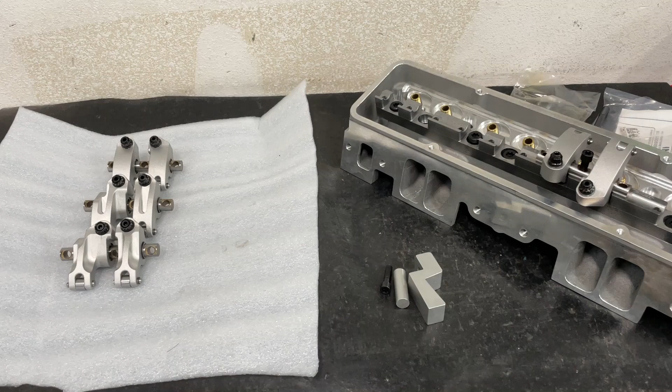This is Friday, which would be about racing, and I've got some information about that, but I'll save that to the end. I'll show you one little tech thing because I did get some parts in, so I thought maybe I'd give you some information about rocker arms, shaft rockers in general. I've done another video, but not like this one.

I wanted to show you some other stuff because I know this has come up before, at least in one of the forums, and I thought, well, why not just do a little video about it while I'm doing my little racing thing, because really not much is happening in racing. It's still pretty hot here, and I have the headers here, and I'll show you that part later on, and we'll talk about it, but I haven't got to do any racing, but I hopefully will soon. But anyway, let's kind of get to today.

I'll give you a little background. I've ordered several sets of shaft rockers. I've got one set ordered from Crower, which has been on order since June. I've also got 4 sets on order from T&D, but they're back ordered. Well, I ordered one of those in June too. So I would love to be able to show you a comparison, but I don't have one of the T&D or Crower in stock, even though they're ordered.

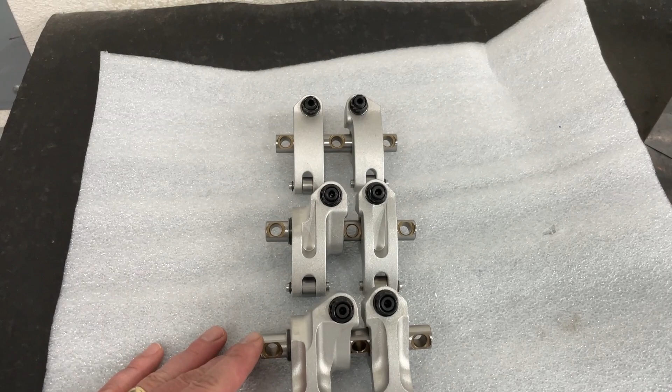But what I do have are these. These are from Jesel, and I'll show you. And I have to say, Jesel's rockers are probably the more expensive shaft rockers you could buy. However, you can get them by far quicker than you can the others. So if you're looking for speed, Jesel for sure will get you quicker. Anyway, let's get started. So I got them kind of in an order here, and I'll give you more information about the shaft rockers themselves.

So this first one here, this is their Sportsman line. These are the more economical ones that they sell, and this is a Profiler head, and I've got one kind of set up on there. These are actually what I use in the S10. These run around $1350 retail for a set, so they're not cheap, but $1350 for their Sportsman ones.

And they have rocker ratios from, this is for small block Chevy, but they have them for LS's and small block Fords and several others as well, big block Chevys as well. But I'm just going to talk about small block Chevys today, but I'm going to show you as much information as I can. They're $1350 or so for the small block Chevy stuff. I'm sure big block Chevys are a bit more expensive, but LS's are probably about the same cost as these. What this one is, this is a 1.5 ratio, both on intake and exhaust, but I'm going to show you this.

This one is the intake rocker, and if you get the Sportsman series from Jesel, you can actually order it with an extra, it's got an O at the end, and that stands for offset. And the standard offset is a .250 offset, which would look just like this one. This is the exhaust rocker, which has an offset. But they've got one that looks just like this, same body width and everything, but it'd be over here on the intake side, and it's a .250 offset. And that works with most of your stuff just fine.

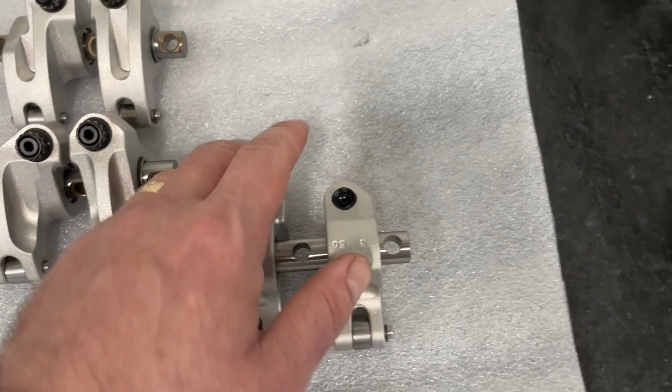Now, here's what I mean by the offset. So I got this set up, and someone had posted about Jesel Sportsman shaft rockers on the Profiler small block Chevy heads, because Profilers are a little bit weird for their heads.

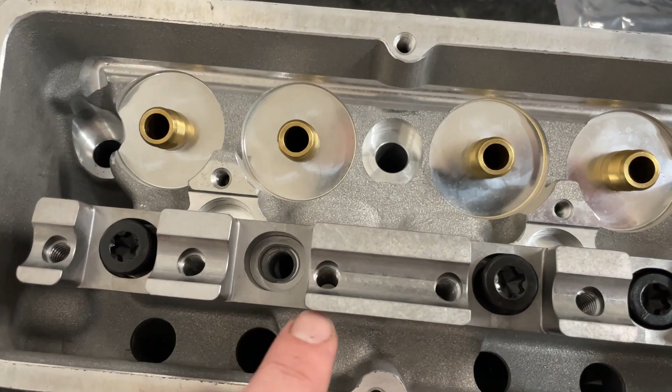Anyway, I put the stand on just because I was curious, and that bolt will go through. This one goes through, but the one that will not go through, and this kind of shocked me, it's pretty close, is this hole here. Now, I'm going to go ahead and tell you some more stuff about these shaft rockers. Hopefully I don't leave anything out.

But for whatever reason, and I'm going to go ahead and take care of this for the customer before he gets it, as you can tell, it's so close to clearing. It looks like it needs maybe 50 thousandths more grinding that way, and it will clear. So I'm going to go ahead and grind this so that one gets through, because I could put a bolt through every one of the other stands, but just not into that one. So far that's the only problem I found.

Now, if you're wondering about rocker arm alignment, if we look at it, they sit almost perfect over the valve. By the way, they can shift a little bit. Let me do it this way. Sorry guys for the camera movement. So pretty close. All right, that one's almost dead center. This one looks off because of the camera view, but it's pretty centered.

And by the way, I should point that out. If you ever get shaft rockers, you should always check both, because it's important to make sure that both are lining up. So that's what we do real quick. We'll just screw one in, and you can see what I mean. Over the center, over the center. That's what you want to check.

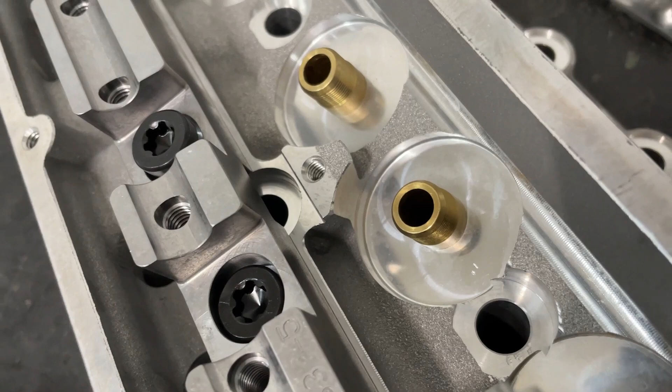Okay. Now, one thing I will say, if you're trying to set these up, the Jesel Sportsman kit comes with one other thing you need to have, and that's this. You're like, what is this? Right there is your head bolt hole. And if you notice, the stand right there is covering up the hole. If you tried using a regular head bolt, it won't go through. So in their kits, they supply this one. And they're only for this hole, this hole, this hole, and this hole. So only 4 for each one. And these take their place.

This is only on their Sportsman. On their racing ones, they actually notch out here, and there's a cut out, and they shift the stand back, so it gives a longer pivot. And so you don't have to worry about that. It's only on their Sportsman that you'll have this.

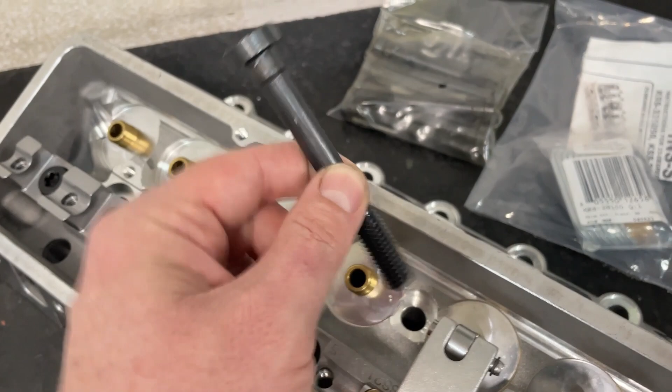Now, they also include shims, because some people get really scared because they don't understand what to do with shaft rockers. I will go ahead and tell you, if you ever run shaft rockers, you'll never go back to stud mount, because it's so much better and easier to use. Granted, it costs more. No doubt about that. But man, it's so easy to set up.

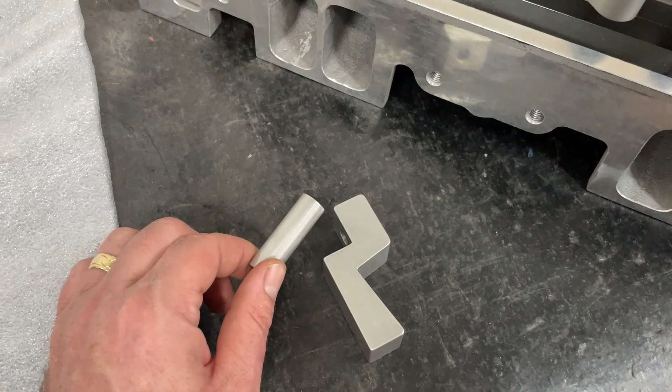But the one thing is, they don't include the tool to set it up. These are the tools you'll need. And you're like, what is this for? Let me take off this rocker super quick. This you put here. And you can get away with not having that, but you'll need the next piece. That piece of aluminum here is the same as the diameter of the shaft. This tool slides over the valve and sits on top of that, like so.

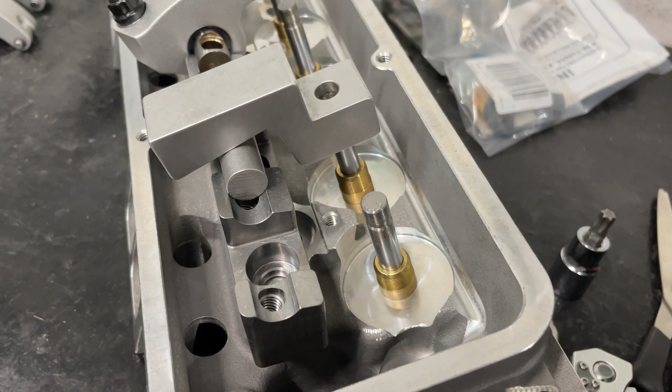If it sits flush, you're good, unless you've got a certain amount of lift. Then you want it 50 thousandths above, I think that's if you have less than 600 lift, and you want it 50 thousandths down if you have more than 700 lift. That's how you set up the Jesel ones. Now, if you get T&D, they have this handy dandy gadget. And the way that one works is you actually have to disassemble their shaft.

So you have to take off the C-clip, pull out the shaft, and you'll set it here just like this, but I got it backwards. You'll take this and you'll try to get it where it lines up with the valve, where it touches there and there. And that's how you set theirs up. And that's supposed to be good for a certain amount of lift, in this case 750. So anyway, that's kind of some of the setup things for it.

This is not a good way to show you how to set it up. Maybe I'll do a different video, just to show you how to set them up. But I wanted to show you that.

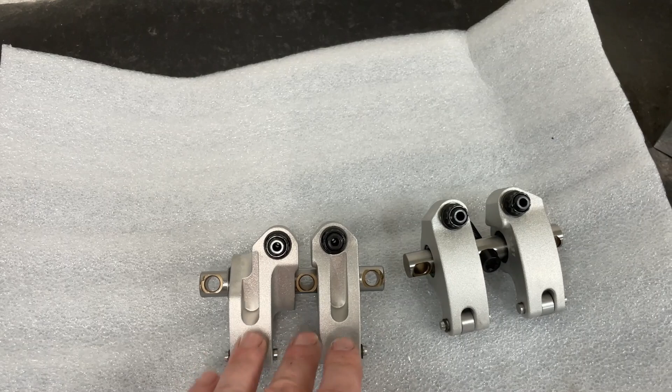Now they're extremely expensive compared to these. So these run, like I said, about $13.50. These run $17.50. So they're really expensive. They have a lightening hole here. That's the big thing. And their rocker ratios, it depends on how much they can get in there. But I know for sure you can run a 1.9 ratio, and this has a 600 offset. So that's a 300, that's a 600.

Now you might say, why in the world do you have such a large offset? Well, that's not even the biggest. Ta-da! This one is the next version up. This is their Mohawk lightening option. It has a beam and it's lightened this way. So the rocker actually weighs less than these. But this one has a 750 offset. To my knowledge, this is the most offset that you can get with a 1.9 ratio for this rocker. Now these are wide bodies, as you could tell, they're much wider.

Now, the reason for so much offset is this. This head is standard, but on some of my racier heads, it's all the way out here, so the port's much wider, because I prefer width versus height. So it's wider, so I can get a larger cross-sectional area without having to raise the port up so much. Actually, I shouldn't say raise it up. I try to take it as high here as I can, but usually to get cross-sectional area, people drop it down. And I prefer not to drop it down, but instead make it wider and get the same area. Of course, that's not always the case in some situations. So because of that, I run a larger offset.

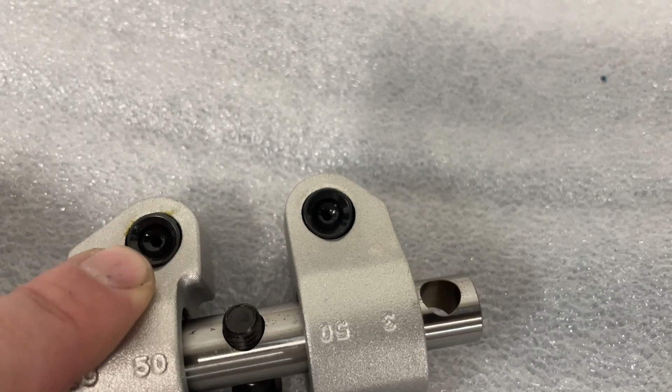The Sportsmen have cup adjusters. This is where your pushrod would go. And most of you have ball ends on your pushrods and they go there. This one, the race version, also has a ball end. This one is not. Sorry, that one's cup. This is the ball end. I said it wrong, my bad. Sportsman ones have cup. The race series usually has cups, but you can order them. This is an option. This is the ball adjuster.

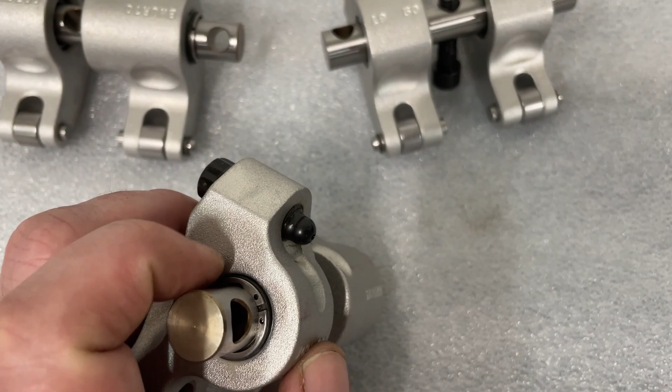This is different because this is usually how the end of your pushrod looks. I ordered it this way on the adjuster because it actually makes the rocker stronger. Instead of having a cup like this, the adjust nut is weaker. So if you do it like this with the ball and then you get a cupped end on the pushrod, it's actually stronger. So that's the reason for those. That's another option that's available. But anyway, that's some information about the rockers themselves, and I wanted to show you that.

So for those that are wondering, will this Jesel Sportsman shaft rocker setup fit these profiler heads?

Yeah, but it turns out, and it could just be me getting one weird batch, but it turns out I'm either gonna have to grind that hole or this one. It's only two end ones, because what's weird is that all the rest go in perfectly fine. And that's usually not the case. Usually if this one's good, this one won't be.

So it's like they've shifted it one way or another. Usually on shaft rocker systems I've seen where they don't fit, it's usually like half of them fit and half won't. In this case, all but the end two, so almost like it's off slightly. Either the head was machined slightly off or the rocker bar. Either way, this is a pretty easy fix, just a little bit of time with the die grinder and it's fine.

This outer edge here, where it sits, there's more than enough room for me to get enough clearance there, so I should be fine. So I'll do this before the customer sees it and out the door it goes. But anyway, I wanted to show you that and tell you a little bit about shaft rockers.

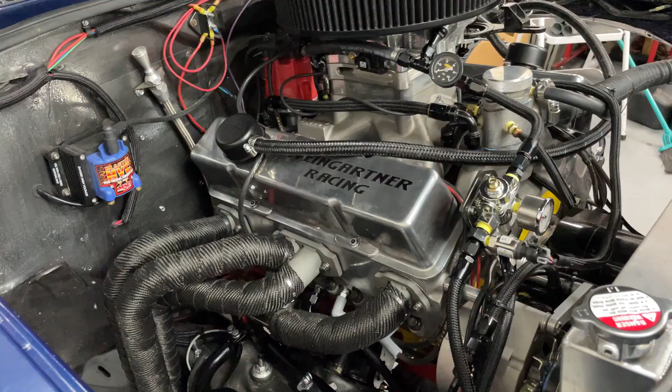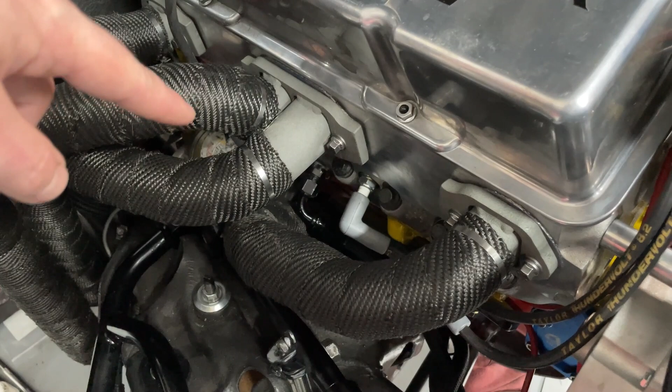The truck is making progress and it hopefully will be out running soon enough. This passenger side header is on and they are wrapped. And let me explain. I had these Jet Hot coated, and Jet Hot has three different types of coating. You have your regular one, which is the one most people see, which is what the Camaro has, and it makes it nice and shiny and silver. That's the most common one.

They're only good to like, I think 1500 degrees or 1200 degrees. But in my experience, typically those will dull. So even though they're bright and shiny, typically right here where the most heat is, they'll start dulling. I didn't get that. The next step up they have is this one, which is their off-road series. It's good at 2,000 degrees. And then they've got another one that's good at 2,500 degrees.

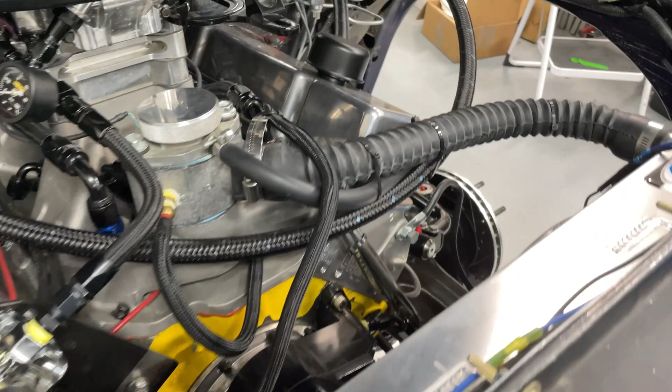Now, somebody said you cannot wrap Jet Hot coatings. That's true of the first coating, the cheaper one, which runs like $450 or whatever, the silver looking one, you can't wrap it. This 2,000 coating and the 2,500 one, you can. And by the way, it's rough, and it's gunmetal gray. They don't have a shiny silver, at least I didn't think they did. And again, the reason for the wrapping is because there will be a supercharger sitting over here on this side, and I don't want the header heat being sucked in by the supercharger.

So the headers itself, this one was kind of a booger to put in because I did, and I hate to do it, but I did have to dent just slightly here for the water line, but not real bad. Other than that, this one's in. I'll warn you, the hardest part of this entire thing was not the headers. The starter. Got the starter in fine, but I made the dumb mistake.

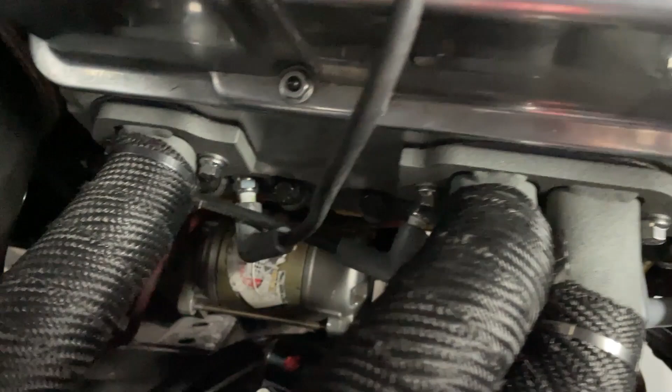And if you ever do this, for the race car guys, what you need to do is put a wire on your starter when it's not on the engine and have a long extension to it and have a detachable electrical connection there. Because me, being the dummy, I didn't do that. So I had to run my wire all the way through there and somehow magically connect it when it's bolted on. I wasted almost 45 minutes trying to get one bolt in for the starter switch.

That little wire on the side of the solenoid. That's almost impossible because there's so much stuff crammed in here, and it was an Allen head. Oh, I should have made a piece of wire that extended out from it with a separation joint. That would have saved me so much time. Next time I'll do that. There's your lesson for you.

There was this funny TikTok video, and yes, I'm on TikTok, but I never post anything. I just watch people do funny stuff. I know it makes me sound weird because TikTok's for young people, but it's funny. I mean, there's political stuff on there, and what you do is you take your thumb and you just scroll up.

But the funny stuff, anyway, there was this girl on there and she was working on a car, and she's like, I don't know why you guys like doing this. I've been wasting 45 minutes on one bolt. And I was like, yes, I understand.

But anyway, that header's in. The other headers are not quite there yet. They're all wrapped. I just got to put them in. Once they're put in, I've got to get an extension and put the O2 sensor on. So that's why the truck's not finished. The biggest thing is I just don't have time. It's taken forever for me to get any time to do anything. But I promised you one more nugget of knowledge, so let me show you.

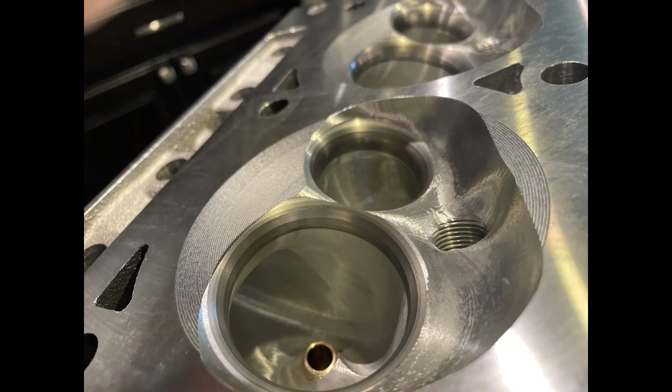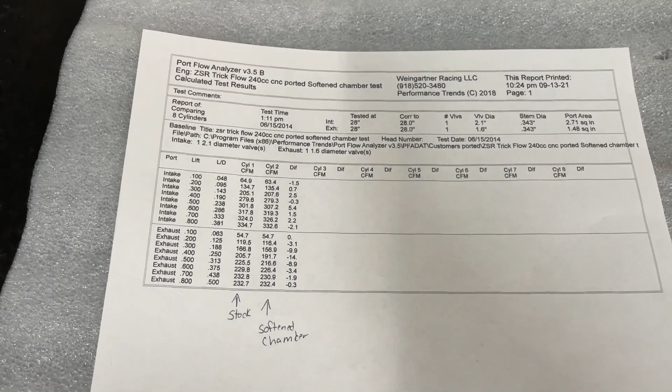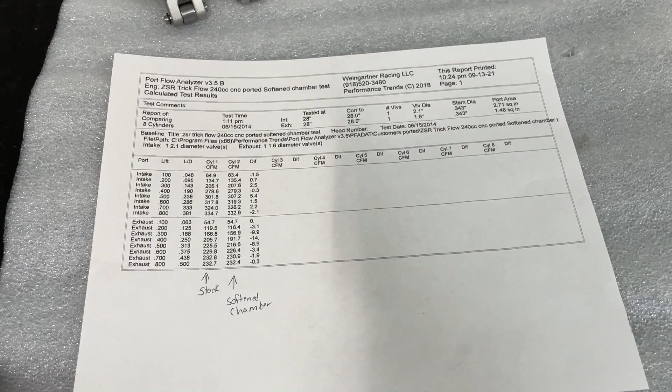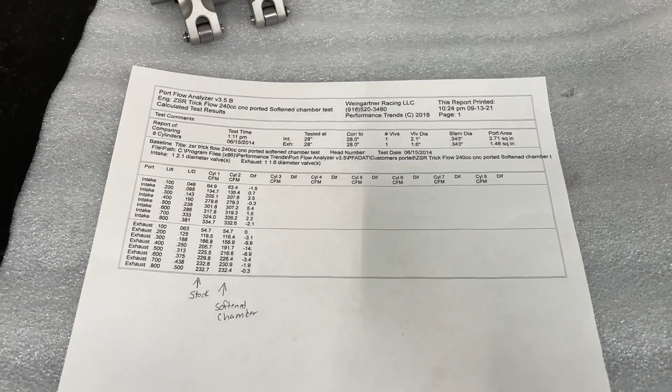Zach from ZSR, he does a lot of Ford stuff. He sent me a set of heads to have chambers softened, and they came back, and I will try to attach a picture to this video. Hopefully I don't forget. And so you can see what's been done with it. And I warned him, it did leave a slight ledge above the 45 because of the seat angle where the top cut was, but just ever so slight. So I know it's going to seal up. That's not a problem. That's after the chambers were softened.

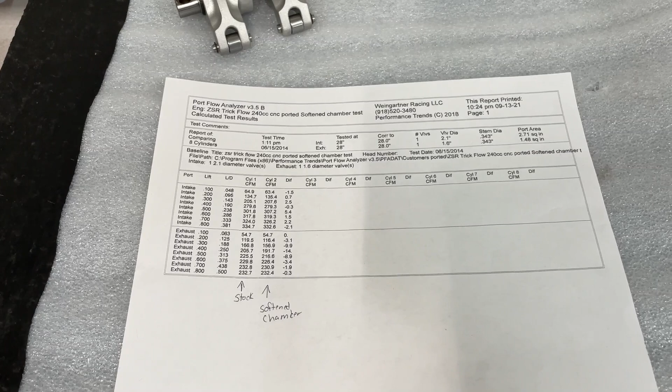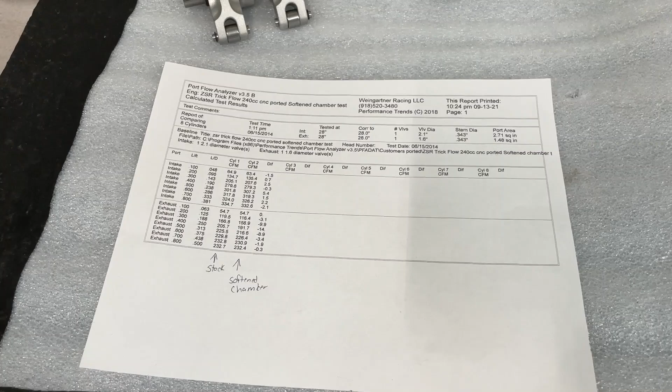However, I was like, I don't think it's going to flow that good. You sure you don't want me to redo the valve job and see if it'll help? And he goes, no, it should be fine. And I was like, well, let me flow it if you don't mind. He goes, sure. So I'm going to show you the results. These are a Trick Flow. They're out of the box besides the chamber being softened. And they're a Trick Flow 240 cc CNC ported head. Really nice Ford head. And I just had valves here laying around, so if you saw me flow ones before, it's not the same valves I used here. So anyway, let's look at it.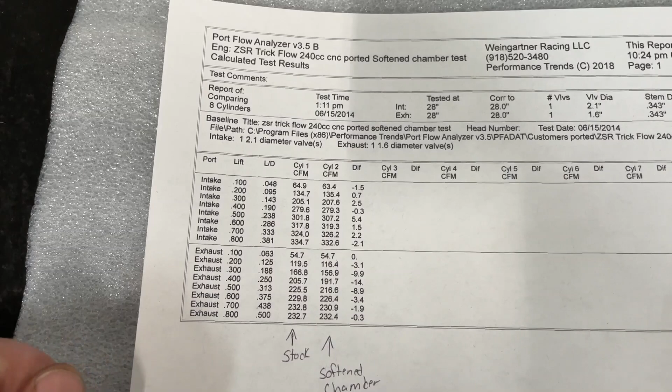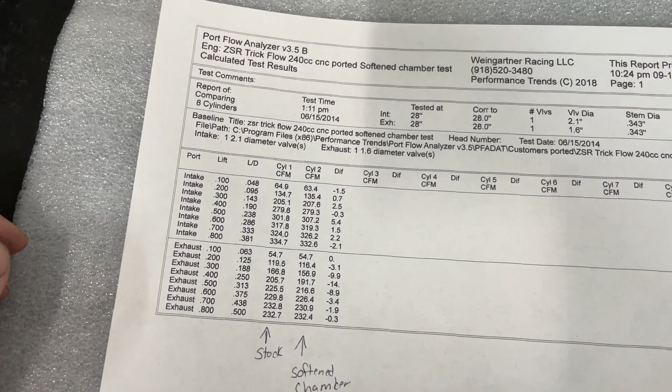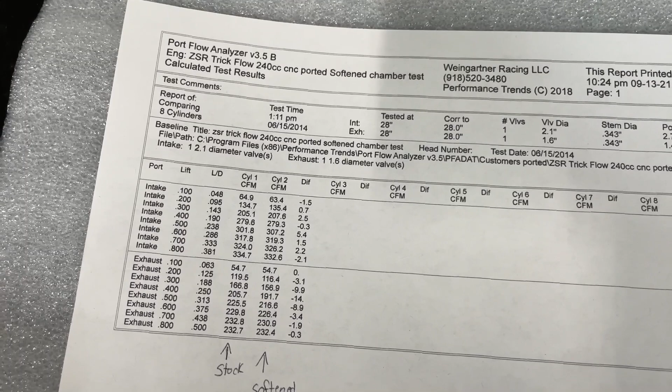This is the stock flow. That's the intake and that's the exhaust. I only flowed it to 800 because my valve wasn't long enough to go further. This is stock, nothing else done. This is with the chamber CNC softened because it's got a cone that ridges in. You can see hopefully if I attach the picture. And there's those numbers. Here are the differences, so you can tell if it gained or lost. I was expecting a huge loss. And what I didn't expect was a gain right here at 6 of almost 5 CFM. And for the most part, it was only like 1 or 2 CFM difference on the intake.

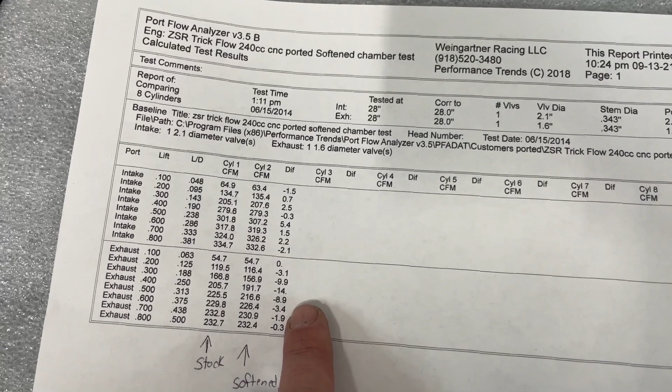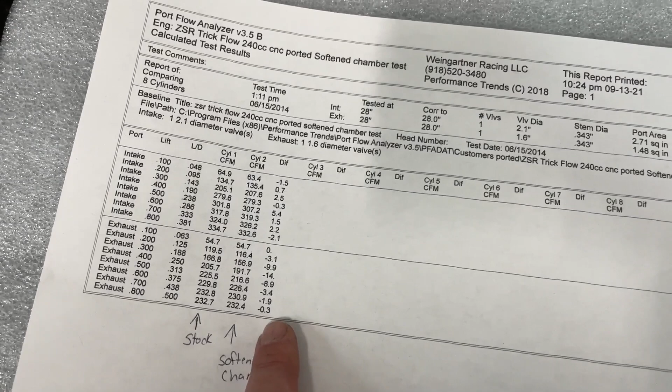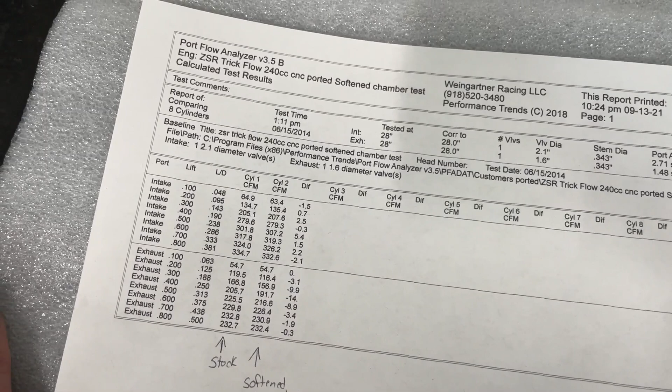Exhaust side now, yeah, it did lose some. 14 there, 10 there. But on the intake, it really didn't change it, which was really weird because the exhaust side I figured would be less affected because the top cut is so far from where the chamber is to deck. So I thought that probably won't have a difference at all. But this, you took out one of the angles. Turns out, not at all. And this is the reason why we test.

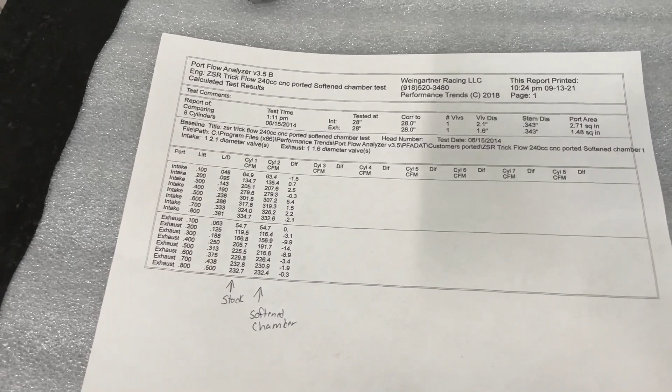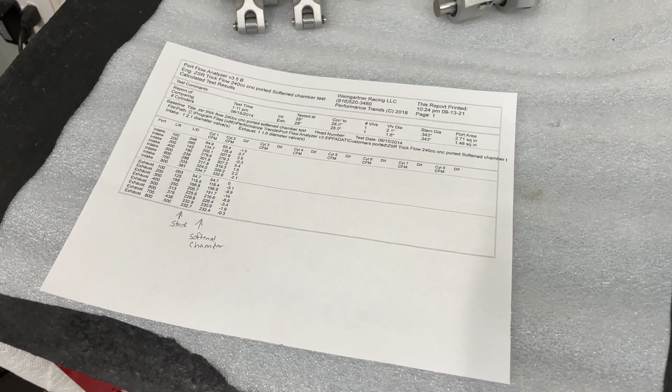On Sunday, for those that made it through this long video, I'm going to take that Cadillac head. And you're like, oh, I don't want to see more Cadillac stuff. Can't you go to anything else? Yes, I'm using the Cadillac head, but I'm doing something different with it that will apply to other heads. I'm going to take some modeling clay. I'm going to make the vane. And I'm going to put the vane in different positions to see what it does to flow, just because I wanted to see as far as research. And you'll get to see the results.

We'll see if having one at, say, the 6 o'clock position versus the 7 or 5 position makes a difference, and go from there. Anyway, look for that on Sunday. Hopefully I can get it done in that small amount of time from now and then.